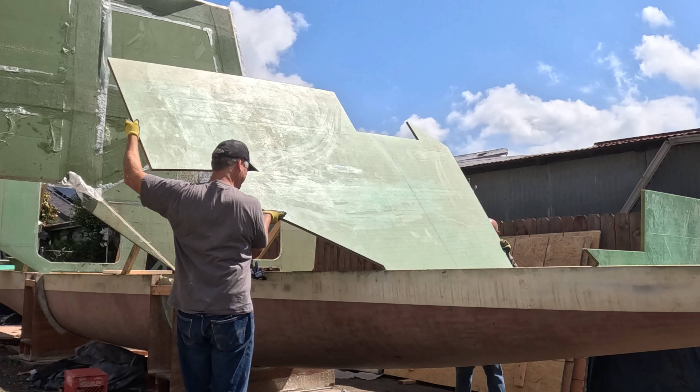Well, now that our major bulkheads are in, we can start putting in the smaller bulkheads, so we're prepping for that. And we're hoping to get at least a few of them actually glued in. And then we'll follow up the next week, of course, with getting them all tabbed in. So our goal is in the next 2 weeks, we're going to get all of them in, but we'll see how far we get this week.

But we have an important meeting we're going to do in the middle of the week here on Thursday with Bruntons and Schionning, because we have to go over our hybrid propulsion system because there's been some changes, and we're going to go over all those with you as well. But first, let's head over to the lot and we'll get at least some work done before we do that meeting. So off we go.

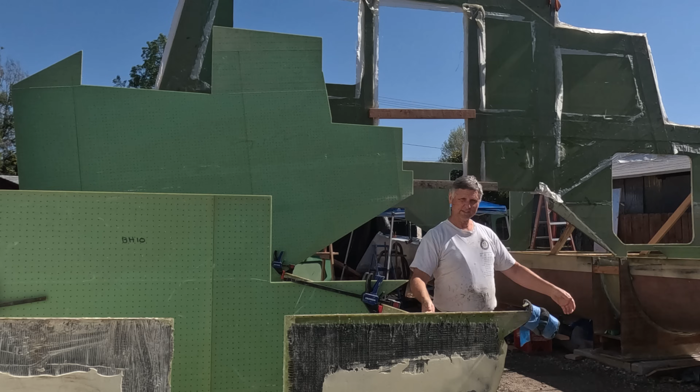Today we are temping in our bulkheads in each hull, the separate ones, not the ones that go across. And we're going to soon be gluing them in and then tabbing them also along with the ones that do go across up there in 5 and 6. So this is 10 and this is 7.

Now 8 and 9 span across the boat, and we can't put those in until we have brought the diesel engine in and inserted it right here. And so we need enough room to come in with the Bobcat to drop that engine in. So that's why we're not going to put the ones that go across the stern yet. But we can do all the other bulkheads, and there's quite a few up and down the boat. So that's the plan. We're going to get that done, and then we're going to work on that tomorrow.

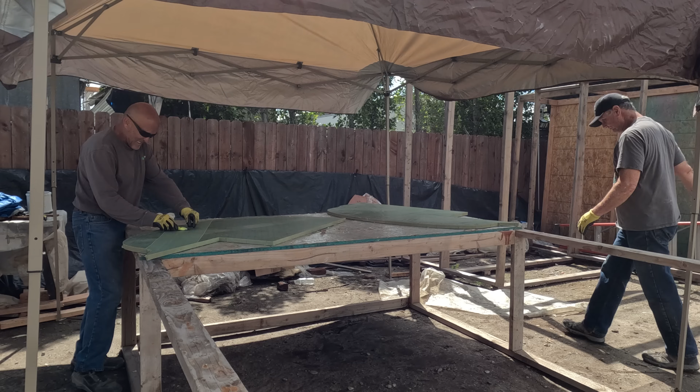And then we're also going to be pulling all the peel ply off of all these different bulkheads. So there's probably about 20 of those we have to pull peel ply off of, so that'll take up much of today. In order to glass these in tomorrow, we got to pull the peel ply on them. And we love pulling peel ply. It's good that we love it because there's about 600 pieces to go that we have to pull peel ply on over time. Not all today, but you know. Many of them are much smaller.

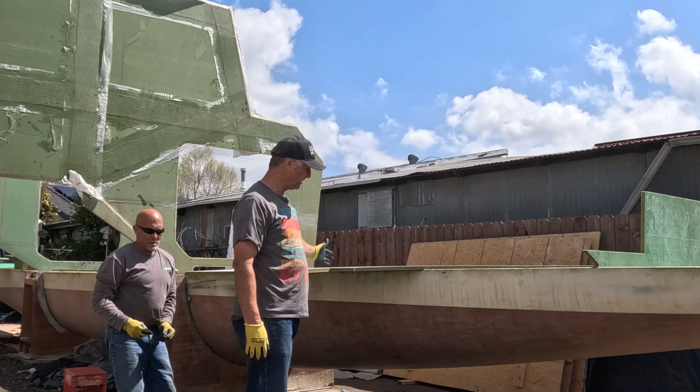Bulkhead 10. Only have like 12 to go. All right, we've marked our distance up to 2850 in millimeters to where bulkhead 7 goes. And now we're going to temp clamp it in place. Let's tilt her up. You gotta come forward. Yep. Okay, and this is the inside, the mark is to this side. Not centered. Okay. Are you there? I am there. That fits in pretty good.

You have a bulkhead 8? Yeah, well, it doesn't go in because it goes all the way across. And bulkhead 9 goes all the way across, but we have a bulkhead 10 we can clamp in right now. We just need the measurements. Needed a temporary brace on that one because it's pretty tall and the afternoon wind. So we just got a brace that's screwed in down here, clamped up there. It'll just keep it from tipping.

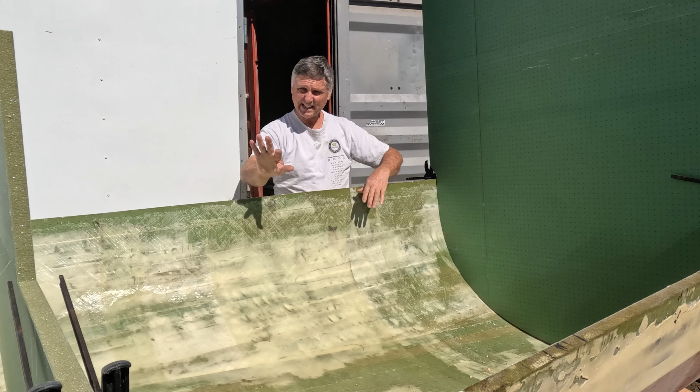We can glass in 7 and 10 here, but before we could glass in 8 and 9 in here, and this is of course after the diesel's in, we need to build a keelson that goes along the bottom of this. Now there's a keelson at the stern where we're at right now, and there's also a keelson at the bow, but we have a little bit more glass work to do up on the bow still, so we're going to try and get to that glass work today so that we can get bulkhead 0 in there, because we have to go from 0 to 3 for the keelson that goes in there. So we've got some work to do on that, and that's what we're going to try to get to this week. But for today, we need to finish some glassing up at the bow. There's some reinforcements and such up there that we have to do.

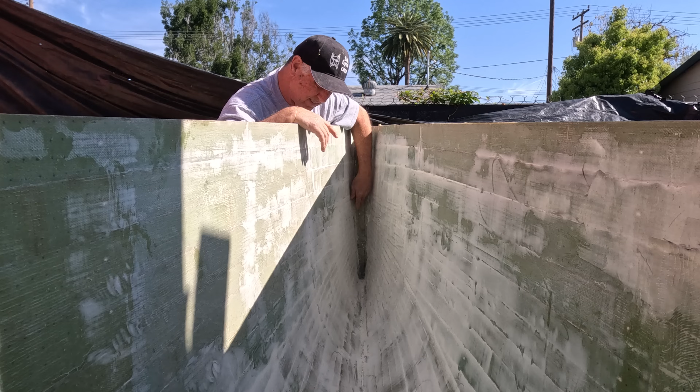Next up on our work on the bulkheads is we actually haven't glassed in just this little bow section right here, and that was because we've got some special work we had to do up here, so we left this section not completed when we did all the rest of the hull. So we're going to do that today. So we're going to glass this in, but first we're going to fix this up with some coving and stuff, because there's a piece of fiberglass that has to wrap around the front here besides the ones that go on the side.

So we've got to prep this for that with some thickened epoxy, and then we'll go ahead and lay down the sides of this and glass that last piece in. So we'll get all that done today. So we have the first, the nose piece, and another one up there that goes across. So one goes around the nose and one goes down, and now we got to fill the last piece in, which is right here, and connect these two.

So because this is very sharp right here, and we didn't want to fill a ton of thickened epoxy to round that off because it's just more weight, what we're doing is we're just taking the fiberglass down and meeting at the bottom here, and that way there won't be any bridge across that sharp part, causing a void in there. We don't want any voids.

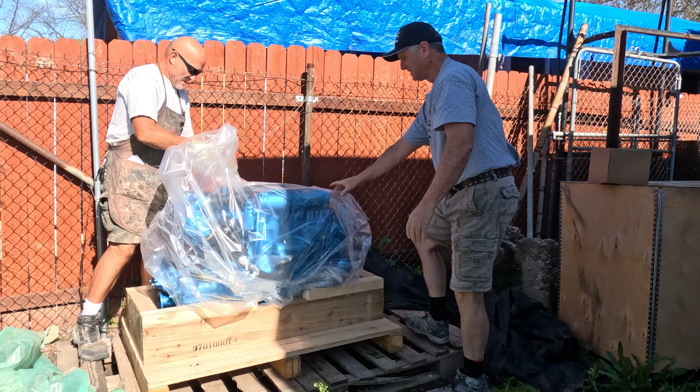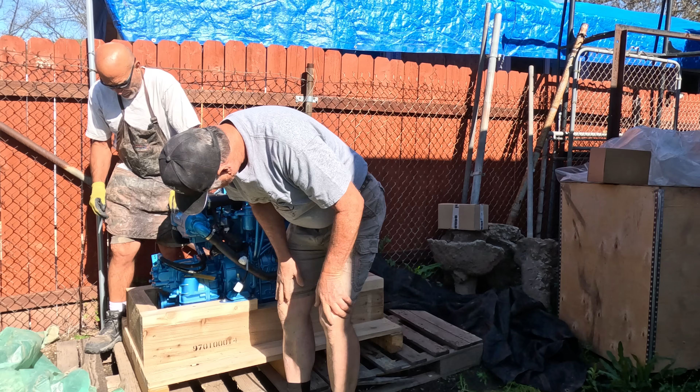There she is. And the critical area is right down here, the transmission, and that's exactly what I thought. This transmission is straight through the diesel, and that is what I expected it to be, but the plans for the boat that's being built in Australia right now, they're using a Yanmar instead of a Nanni, and that transmission is set at a 7-degree angle where ours is set out straight.

So that's going to change some things about how these motor mounts are going to be built, because this whole engine is probably going to get pitched a few degrees. The Nannis can be pitched up to 7 degrees, the entire motor.

But just for fun here, we're going to take a measurement of this so I know what the exact length is. We have it from plans, but I want to see for real, right to the end of the furthest out bolt to over, so we'll check that out. We see 130 millimeters. Centimeters, goodness. 130 centimeters.

This is the loom, and this goes up to the helm where the gauges are. And this is the main reason that we moved the engine. You have those cutters still? I do. Originally, we were going to be having the engine on the port side, and we moved it over to the starboard side later simply because I don't want to order an extra long loom.

And so this one should be long enough to reach from where we are on the starboard side here up to the helm, which is going to be about here. So much closer. So this should get to use the standard size loom here instead of paying for an extra.

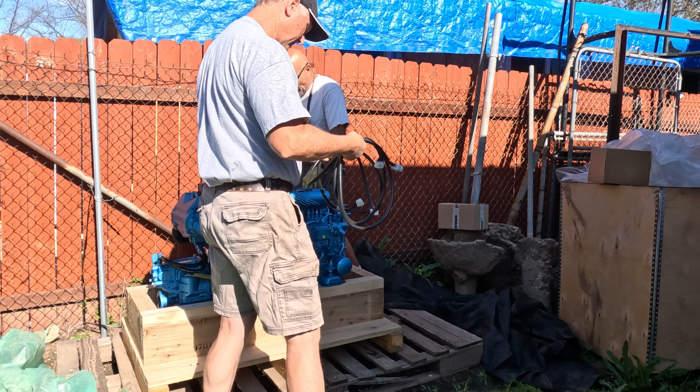It doesn't really matter which side of the boat that the diesel's on and which side has only the electric motor. This is a good place to head back to the office and talk about our meeting this week with Schionning Designs and Bruntons. So as we mentioned, we have to get the diesel into the starboard canoe pretty soon, otherwise we can't put the rear bulkheads in.

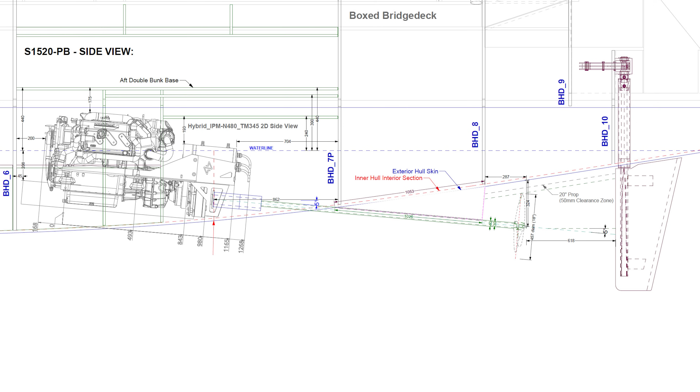And that means Schionning has to design the motor mount system for our specific hybrid propulsion engine. In order to accomplish this, Schionning needed to know about our entire diesel hybrid system, from engine all the way to the prop. And Bruntons needed to know some particulars about our propulsion system as well, so that they could design the right EcoStar autoprop layout and sizing for our catamaran.

So we got the two companies, Bruntons from England, Schionning from Australia, and of course we're in Southern California. So we found a time where we could all get together, early in the morning for me, late in the day for them. And we took a look and discussed the list we have of our desires for our propulsion system. So let's take a look at each one of these desired points.

However, we went over some of these in a previous video, which I will link up here or down in the description. So I'm only going to briefly touch on those, but we'll spend a little more time talking about the new additions to our propulsion system. So let's take a look at that whole hybrid setup.

Here are the 10 goals we went over in our desired diesel-electric hybrid propulsion system. Though it may look like we would have to compromise on some of these wishes, we believed we could achieve them all if we could get the right setup. Number 1, while motoring forward, supply at least 100 horsepower to the props for emergency power. Between our single 80 horsepower Nanni diesel engine on the starboard side, with a 25 kilowatt electric motor attached, and our 25 kilowatt electric motor on the port side, we'll get about 100 horsepower total.

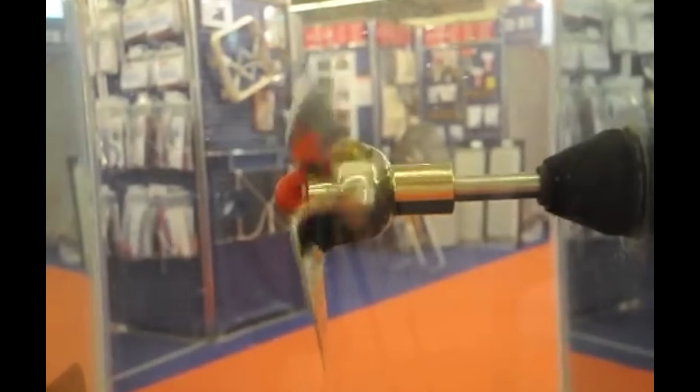Number 2, in reverse, we need efficient stopping power to slow the boat when needed. We use an EcoStar autoprop from Bruntons, which has reversing blades that put the leading edge of the blades in the correct direction for efficient thrust, this time in reverse.

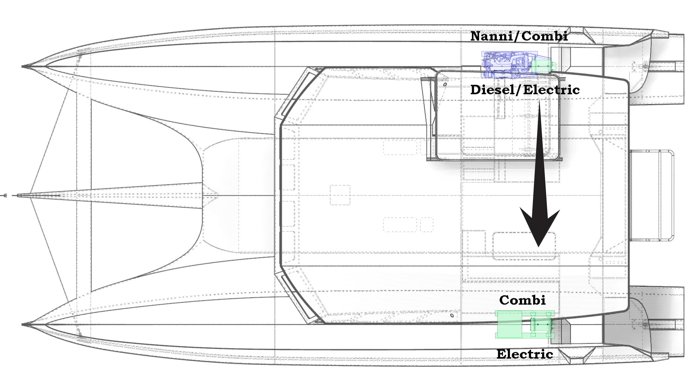Number 3, drive both props from one diesel engine for long-distance cruising. As mentioned in number 1, the diesel turns the electric motor on the starboard side, which sends 12 kilowatts to the electric motor on the port side. This is enough to achieve cruising speed, so both props are turning, which means we don't have to use the rudders to offset the turn from just one prop spinning.

Number 4, we need to drive both props from the electric propulsion. We have a 25 kilowatt electric motor in each hull, so when we have enough battery power, we can power both props from our electric motors.

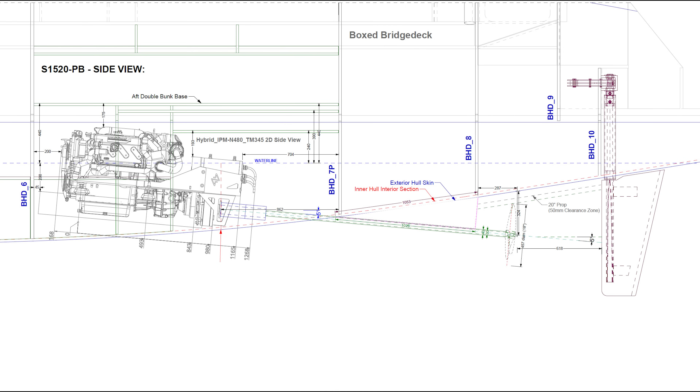Number 5, have efficient thrust whether the diesel or electric is turning the same prop. Diesel engines run at a higher RPM than an electric motor, but we have both attached to the same prop shaft and prop. The only way to have both work efficiently is to pitch the prop blades differently for the engine versus the motor. Fortunately, the Bruntons EcoStar Autoprop will do just that, since the blades change pitch automatically based on RPM.

Number 6, we need to regenerate power while sailing from one or both props being turned by the passing water. The Combi system is made to do regeneration. It'll let your props turn from passing water. They then turn the electric motors, and we get power sent to the batteries from wind. Number 7, have the props be efficient for regeneration. Since the EcoStar Autoprops adjust their blades automatically, they're well suited for efficient regeneration.

Okay, so now let's talk about the additions to our system since we made that other video. Number 8, use the diesel as a 12 kilowatt generator as we're motoring or at anchor. The issue here was that the diesel was always going to turn the shaft if it was in gear to turn the Combi electric motor. That means we could use it as a generator, but only when underway. We want to use the diesel and electric motor combo as a generator while we're at anchor as well.

For that, we would need a way to disengage the prop shaft where the electric motor belt is attached. I talked to Combi about this a few months ago, and they designed a new magnetic decoupler system that does just what we need at the push of a button from the helm. Now, you shouldn't run a diesel without a sufficient load on it, but that's taken care of by our 25 kilowatt motor being turned by the diesel when we're in generator mode.

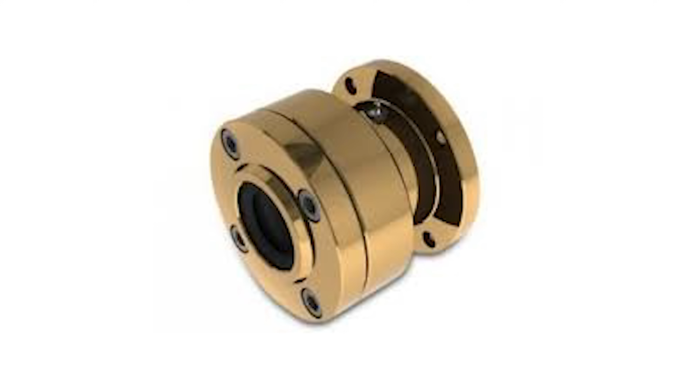Number 9, cut down on vibration from a straight shaft setup. Straight shaft systems are known for having more vibration than sail drives. But if we add a Bruntons Sigma drive between the shaft and the prop, we can cut down on that vibration. And if there's any flex in the boat or motor mounts, the Sigma drive allows for 3 degrees of movement, which takes the strain off the gearbox.

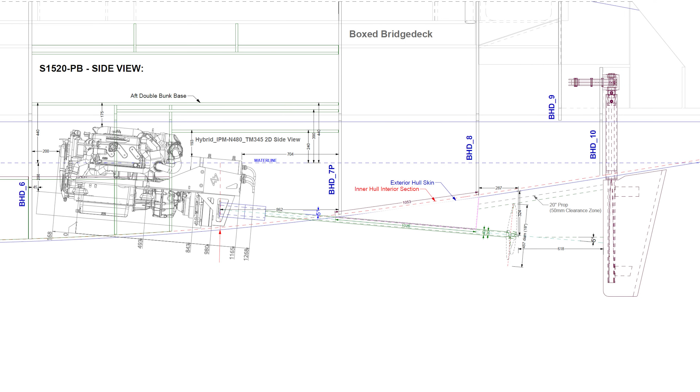Number 10, feather the props for less drag, unless, of course, we're regenerating. We needed a solution that would allow our EcoStar props to feather. To make that happen, the shaft must be stopped and prevented from further turning. Otherwise, the water will turn the props and the blades will deploy and cause drag. We needed to find a prop shaft brake that will allow us to stop the shaft.

Bruntons makes such a brake, and it's called the Auto Lock. Unfortunately, it's designed to work on a diesel-only boat. It consists of a brake rotor, a caliper, and an actuator. The actuator is tied to the diesel by oil pressure. While there's pressure, the actuator unlocks the shaft, and when there's no oil pressure, it locks the shaft automatically.

But with our hybrid electric motors, that means when the diesel is off, the shaft is locked, so we couldn't use our electric motors. The solution I came up with is to purchase just the brake rotor and caliper from Bruntons, but not their actuator. The auto-lock caliper is actuated by a cable. All we need to do is purchase a set of cable throttles. Normally, these are used to pull a cable attached to a carburetor, but instead, we'll have the cable pull the caliper closed on the brakes.

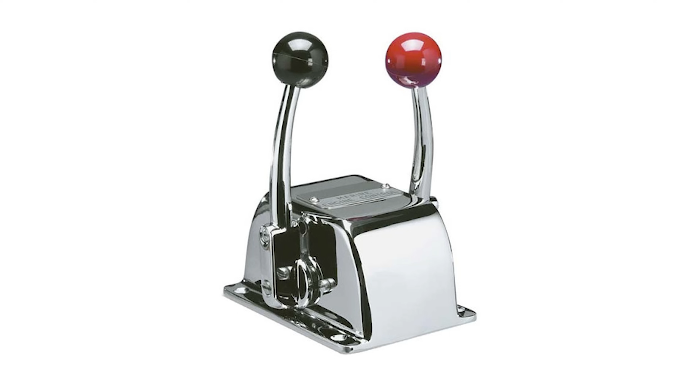Now, we can stop either or both shafts using the 2 throttle levers. That way, if we want to regenerate from just one prop, we can lock the other one. Or if we want to sail with less drag, we lock both and the autoprop blades will feather. David at Bruntons was happy to sell us just the rotor and caliper and agreed my solution should work just fine. So, by adding these additional mechanisms, we can achieve all our goals without major compromises.

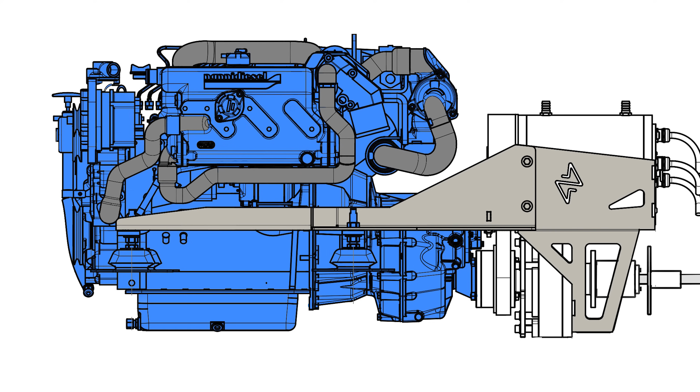Here's the layout for the starboard side, which has the diesel. It's the most complex, though the electric system on the port side still needs the Sigma drive, Auto Lock, and EcoStar prop, but does not need the magnetic decoupler. But let's take a look at the diesel side and where all these systems are located. And this is the Nanni diesel in blue, with its gearbox. Then, there's the 25 kilowatt combi electric motor shown in green, with custom combi brackets shown in silver. These attach to the motor mounts to hold it in place. A belt goes from the electric motor to the prop shaft.

Next, the magnetic decoupler from the combi sits on the shaft under the motor, shown here in gold. Heading further aft along the prop shaft is a Sigma drive from Bruntons. This is shown in dark blue. Finally, aft of that on the prop shaft is the rotor and caliper from Bruntons Autolock system. Though it isn't shown here, the EcoStar prop is at the end of the prop shaft.

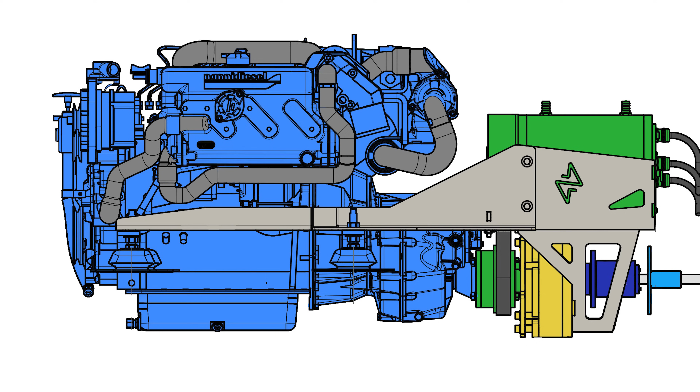During the meeting, Robert from Schionning showed us the design from another Solitaire 1520 being built in Australia. But they use a Yanmar diesel engine with a different gearbox and a smaller electric motor. In their design, the prop shaft is attached to the hull with this skeg. However, David from Bruntons pointed out that their autoprop blades need space to flip around, and might have problems with that skeg design. He suggested changing to P-brackets to hold the prop shaft, and I agreed. Bruntons offered to supply those brackets for our system, and I accepted. So that's our very configurable, efficient diesel-electric propulsion system for SV Lynx.

Now Schionning Designs and Bruntons are working together on the design for our motor mounts and the prop and how far it is from the hull and how far from the rudders and the angles and all that good stuff. So they're doing a little back and forth and working out a design that works for both. And they'll get that to us soon, and we need that because we can't put those bulkheads in at the stern until we build the motor mounts, and until we get those plans from Schionning, we can't do that.

So speaking of working, let's go ahead and go back to the lot because we still have a couple days worth of work and we've got a lot to get accomplished this week. See you there. It's Saturday, end of the week, and we've accomplished a lot of things this week on getting our smaller bulkheads in.

But we didn't show you tons of that simply because we were pulling peel ply off all these different bulkheads. One's way down there, the ones are in there, the ones are in this pile here. A lot of work pulling all that peel ply, but that would have been boring, so we only showed you a little bit of that. And we had a lot of prep work inside the hulls because we had to rough up parts of the hull to mount these in and stuff. And again, the sanding, so we didn't show you a lot of that.

But we had a lot to talk about with our hybrid propulsion system since we had our big meeting with Bruntons and Schionning about that. And it seems like that's an odd thing to be doing right now, but it isn't, because we've got to create those motor mounts inside. Actually, it's not this hull. The motor mounts are over on the starboard side. And for that, we need the plans. And to have the plans, we had to settle on all the different parts of that propulsion system. So that's why I went over all that with you guys a few minutes ago.

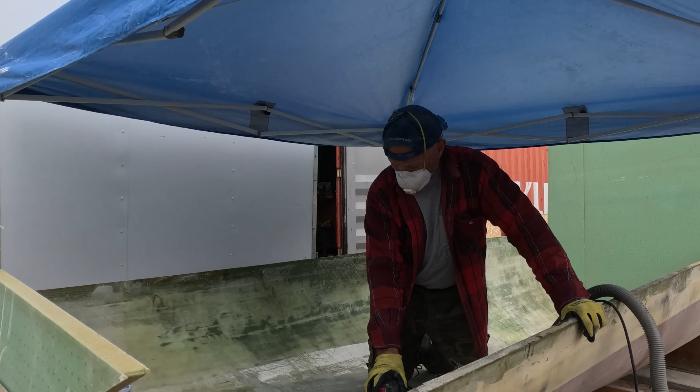But today, we're done with prep, and so we're going to get started glassing in some of the bulkheads. And by the end of next week, we're going to have all of these in. So we're going to start out and do bulkhead number 10 and bulkhead number 7. Remember that 8 and 9 are going in later after we put the diesel engine in, which is why we've got to get that engine work progressing. But we'll put in 10 and then we'll put in 7, and then on both sides. And then next week we'll go ahead and put in the ones going on forward. So that's what we're up to today. We'll show you that. First things first, Brian's going to roughen up the hull with some 80 grit sandpaper there so that we can start bonding that bulkhead number 10 in.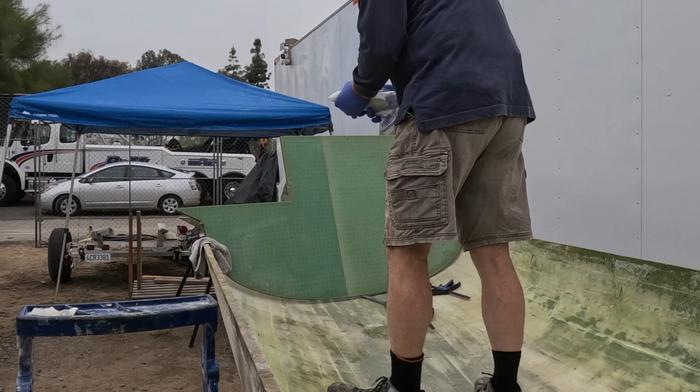All right, so we've got this in place and we're sticking the cove on the side here so that it'll be ready to tab in later.

Brian's got like 8 hands there that he's got to hold stuff with. He's an octopus, the girls say.

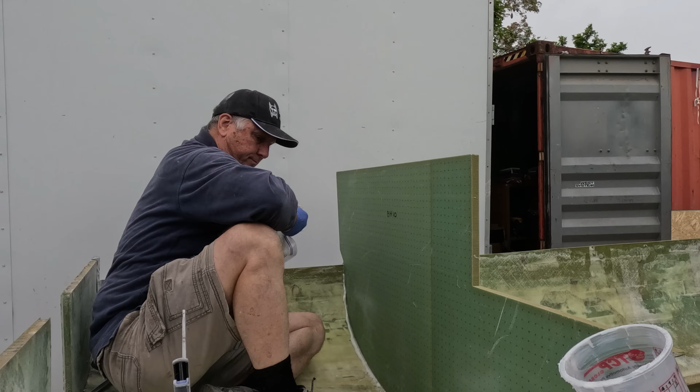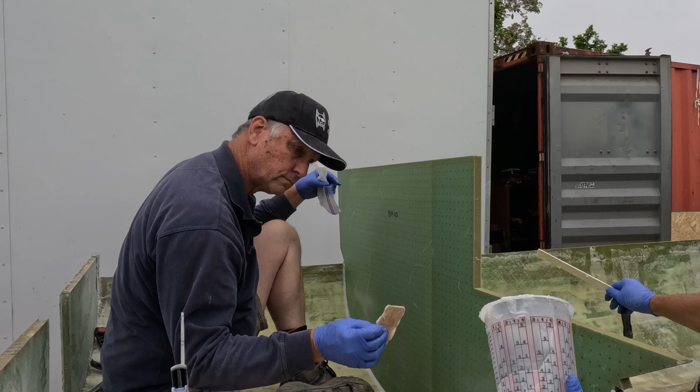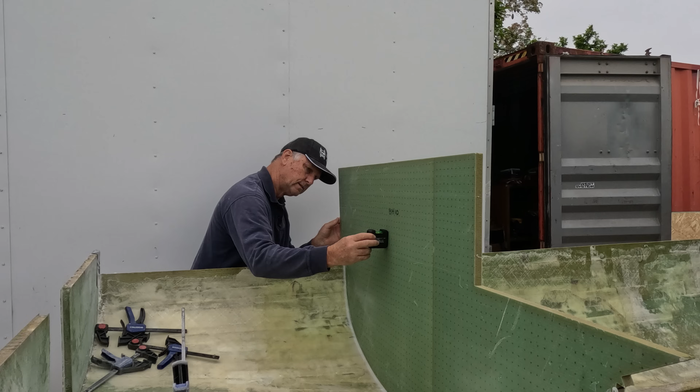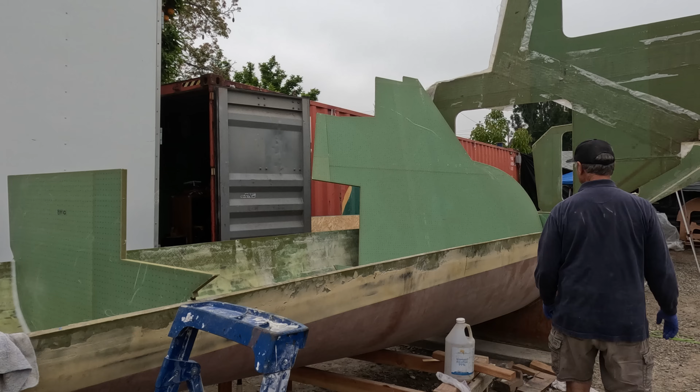Okay, number 10 is in. We'll get the level out, make sure. We already leveled it once, but we'll level it again, assuming I don't kick it right now getting over here. I did not. Let's take a look at where we're at. Zero. That's what we want. All right, so we got our cove in, and I've double checked the level on it. We're good to go there. Do a quick test. Don't bang that on the way by.

We already prepped 7 here to go in, so we're gonna go ahead and put our bead here for 7 and get it positioned. It goes actually about here. And so Brian's mixing up. We're gonna need a lot more epoxy. We used 900 milliliters over there. We're gonna need more like 1200 for this. It's a lot larger. As I mentioned, we're trying to get 10 and 7 in today on both hulls,

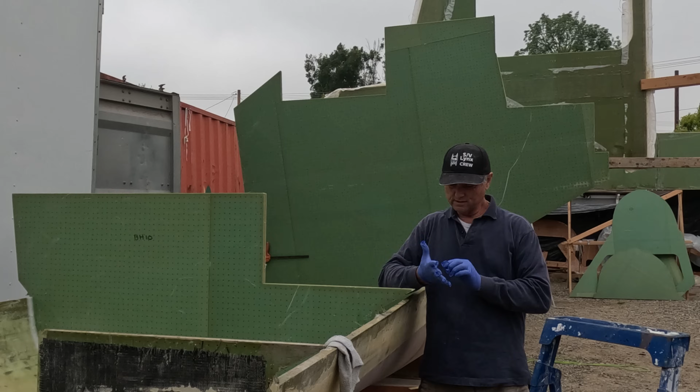but next week, our goal is to get the rest of them done, which is 0, 1, 2, 3, and 4 in both hulls. So that's 10 of them. But we're going to get 4 of them done today. And so we have all next week to get those other 10 in, and of course, tab all of them. And the tabbing will go pretty fast because we've already prepped for it. As we're gluing these in, we've already prepped, sanded for tabbing. And bulkheads will already be leveled like this one is, and glued in, so we can just go to town on tabbing. So we should really be able to get all of these bulkheads in, which are, from a tabbing standpoint, 10, 7, 6, 5, 4, 3, 2, 1, and 0.

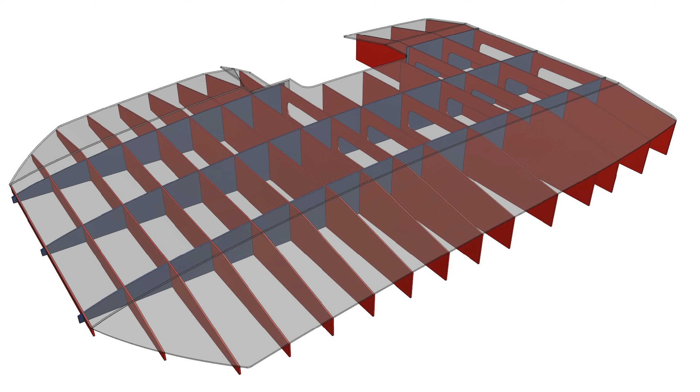So lots to do in the next 5 days of work, but we want to get that done because the next thing we're going to do after this is build a cabin roof. And we're really looking forward to getting to that. And that includes the rain catchment system. And I believe the most time in getting that thing built will be the rain catchment system. That's going to be the most work, but it's worth it to me because we get that handhold and that recessed track that's easy to clean out. It's just a lot nicer. So it's worth that extra work. And then the other thing that's going to take time is setting up the MDF forms and getting them all perfectly leveled everywhere before we build the roof on them. That'll actually take more time than building the roof.

Building the roof is pretty darn easy, with just 5 pieces that we have to tab together on 1 sheet of laminate, not over the whole thing, just down the center. So it's pretty easy to build the roof. It's just that the rain catchment system is going to take a little more work than that.

But we added that. If we just had to do the roof the way it was originally designed, this thing would be done in a couple days. But it'll take a little longer because of the rain catchment system. But we want it.

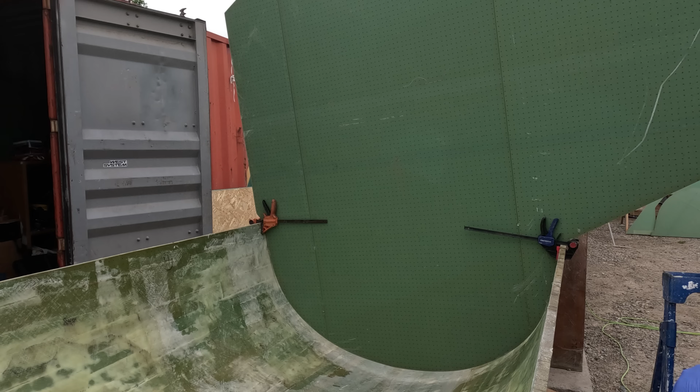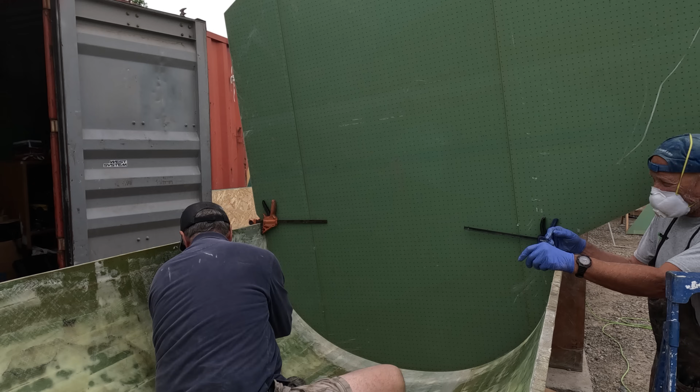All right, time to glue in bulkhead number 7. Okay, that's the initial bead in, so we'll be able to set this on, and then Brian's mixing another one so that we can put the cove on either side once we get it in place. So we'll wait a moment. This won't set up that fast.

It's pretty cool today. We're about 65 degrees Fahrenheit. But this West System epoxy is great for this stuff because we want it to set up fairly rapidly. We don't want to wait forever for this epoxy to get going. So we want to use West System for this, but it also means we do have a clock on it of probably about 30 minutes that we've got to have this bulkhead on here. But it'll only take Brian about 5 more minutes to mix up another batch for the cove, so we're good.

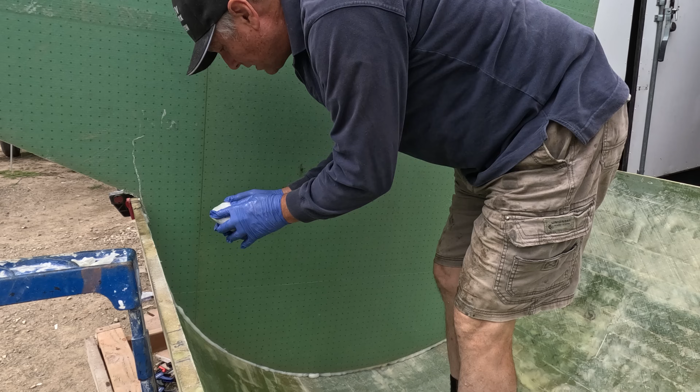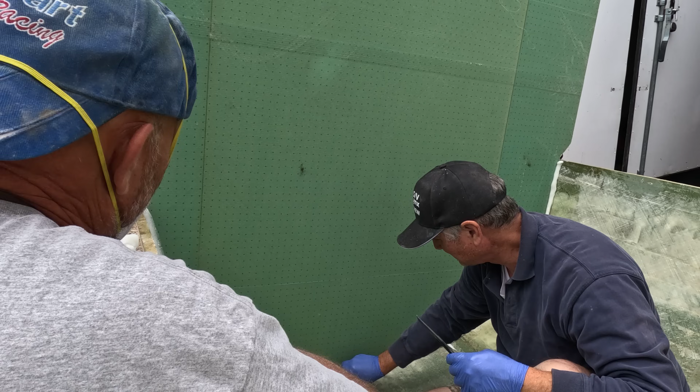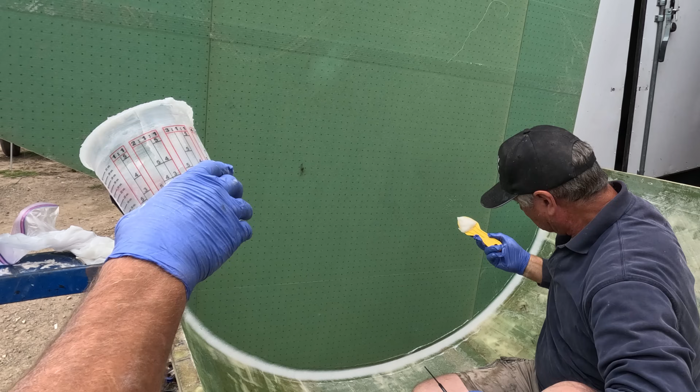Okie dokie. Let's go up. Pretty high up so it gets past, yeah. Now down. Ooh. It starts getting more interesting. Trying to go down at the same time as you. We're about the same amount down. How's that? Just a little in the corner right there. Okay. That went well. I say it looks nice.

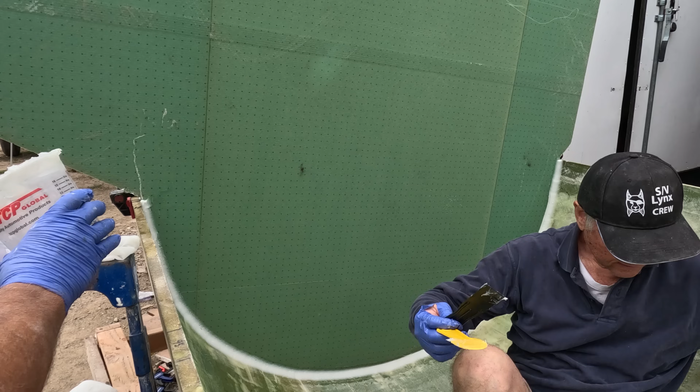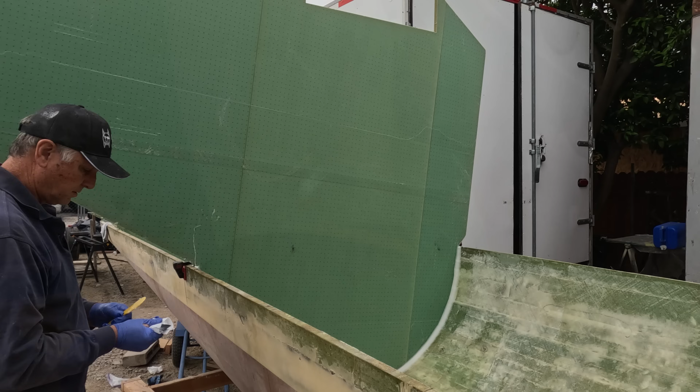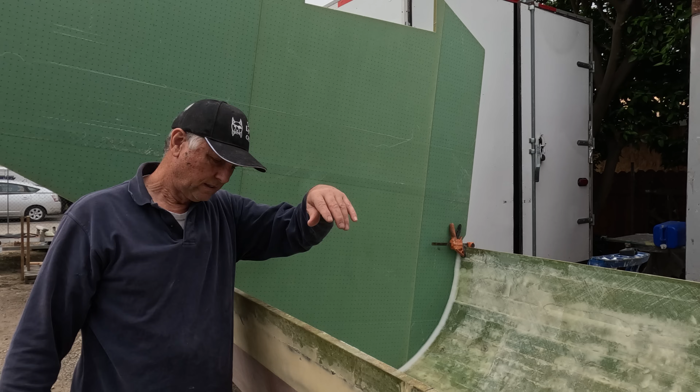Very good. All right. Now we just got to check the levels on everything. We leveled it when we put the first bead down, but that was only pretty good, meaning we're going to double check it down to the tenths of degrees now. Make sure that it's nice and in position before this sets up. Dead level. Actually put some clamps on it, make sure that it's not going to go anywhere. There's no wind today at all, so it's a good day to do this because I don't have to worry about a wind gust suddenly moving this before this sets up.

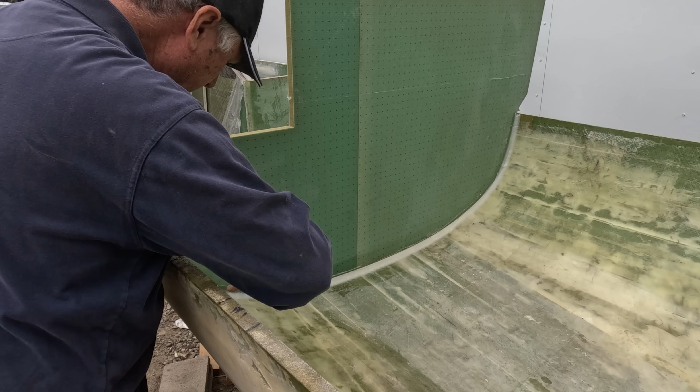But being West System, in another 30 minutes to maximum of an hour, this is going to be set up enough that this isn't going to move at all. For example, over here, just check this. Yeah, that is now the consistency of Jello already, and this has only been 30 minutes or so. So another 30 to 40 minutes, this will be very solid. But even now it's not going to move because it's set up enough that it's holding it. Of course I don't want to hit it with something, but it's just not going to move easily right now.

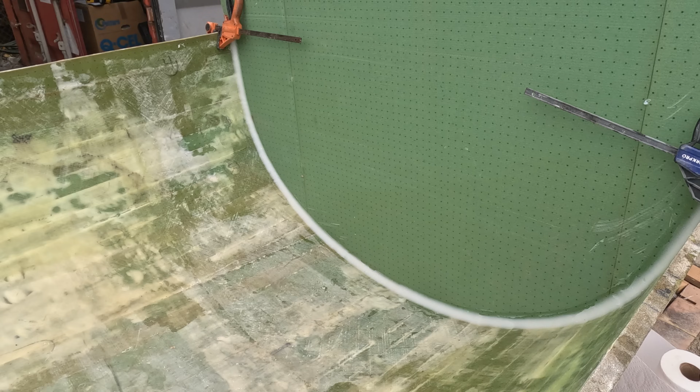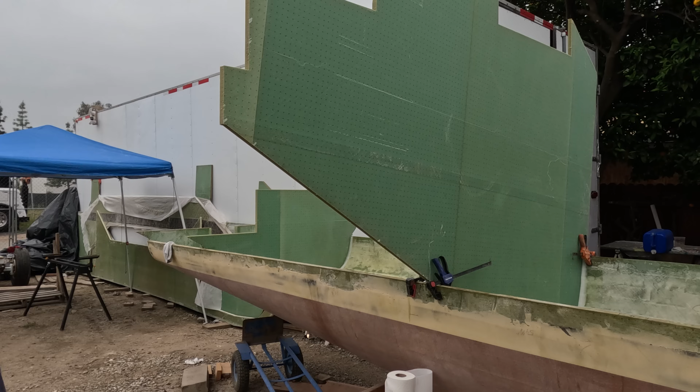And so we got the cove there, and cove on that side, and a cove on this side. So bulkheads 7 and 10 are in. Well, they're glued in. We're going to be doing the tabbing next, probably Tuesday and Wednesday. We're going to be tabbing all of these bulkheads. Right now we're going to concentrate on just getting them all in there glued.

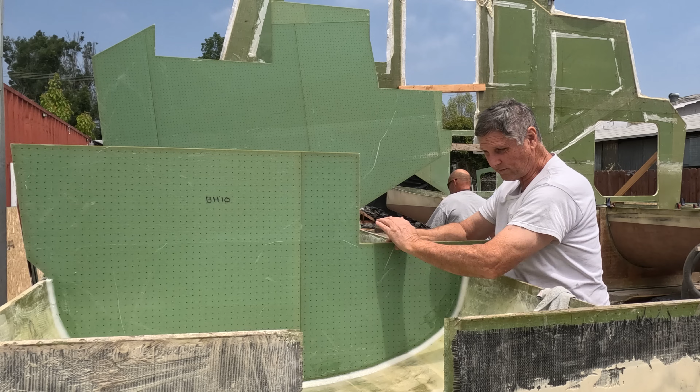This is why we wanted to use West System epoxy, because we just went to lunch and this is already hard as a rock here. So this is fully glued in and not going anywhere. Neither is 7. This is also completely set up over here. So now we don't have to worry about this falling over at this point if we touch it. So good to go. So we're going to go to the opposite hull over on the starboard side and do the same thing, 10 and 7.

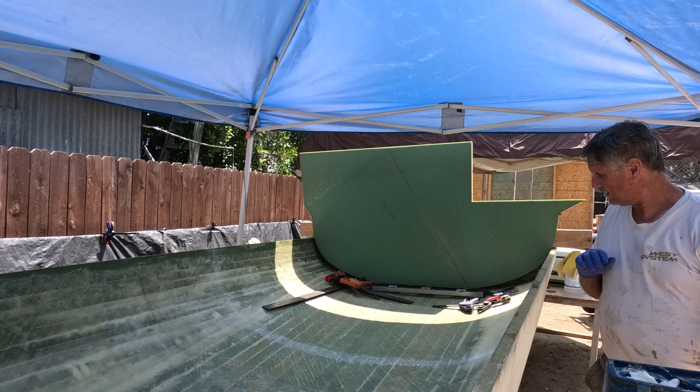Over to the starboard hull, and this is where 10 goes. We've roughed it all up, we've cleaned it, ready to put it in, and we dry fitted it, of course, to make sure that it fits properly. And so we're going to drop 10 in, and then as soon as that's done, we're going to do 7 up in front there. And that's our goal of the day, is to get 7 and 10 done on both, and we're going to achieve it.

Things are going well. It's exciting to be building the assembly of the boat. I don't care what it is, bulkheads, webs in the floor, eventually furniture, any of that stuff that is constructing the boat is fun for me to do, because every step is one day closer to us getting out on the water, and we're very excited to do that. Got a lot of learning to do between now and then. So we're cooking. I gotta go. I can do it from in here on this little guy, number 10.

Okay. Are you on the? I'm totally centered on my marks. Okay, down. Okay, but what we don't know is if it's level. Right. Grab that. Thank you. Oops. We are level, so that line's way off.

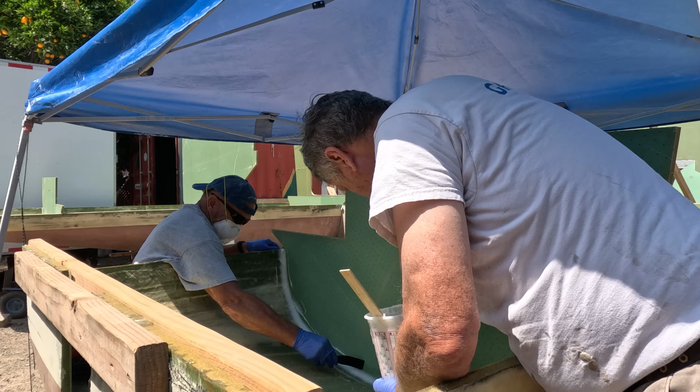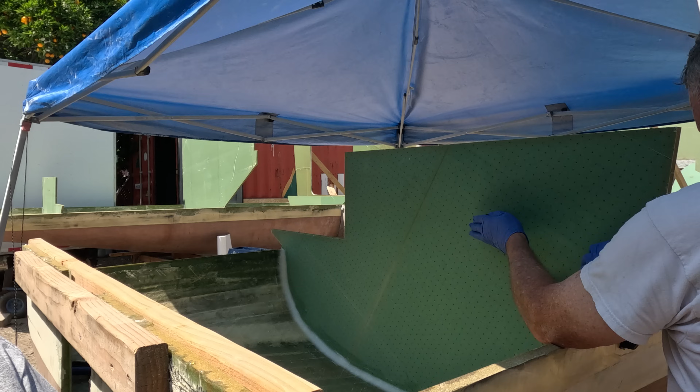How about the top? Perfectly level. All right, we're gooping up the stern side of this now. Look at it smoking like a... Oh, yeah, it is. Okay, that's level. And that's good. All right.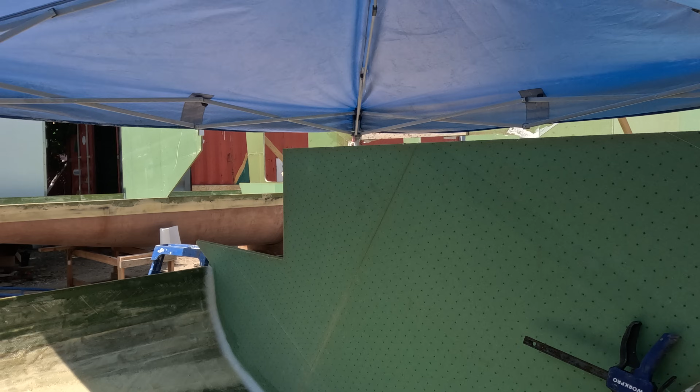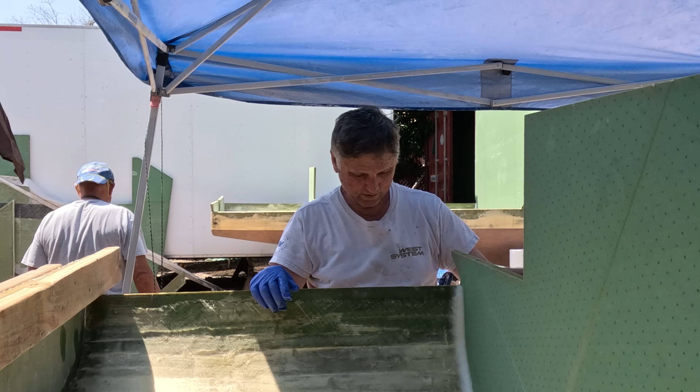So it's as cool as it really can be, but there's quite the exothermic reaction on this stuff. So it literally gets smoking, and this isn't that thick. If it was in the cup, it would be even crazier, but just the way it is. Nothing we can really do about this. The temperature is correct for doing epoxy, and we're not in the sunlight, so it is what it is, but it is smoking.

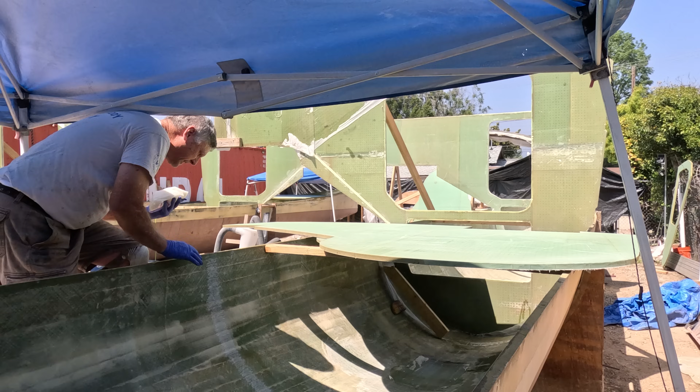All right, well, it's this warm. Brian's gonna keep mixing while I get this first batch on, because we gotta get 3 batches done for this larger bulkhead, and we don't want it to set up too fast.

Well, that concludes our work at the lot for this week, because we achieved our goals. We got all the peel ply off. We got prep done on both hulls for the bulkheads, and we started gluing in the first 4 bulkheads. So next week we'll do the other 8, and that'll go easily because, again, we've already prepped for it all and got all the peel ply off. So that's going to be Monday morning.

We'll start gluing those babies in, and we'll get 4 done per day easily. So 2 days and we'll have all of them glued in, and then 3 more days we'll have them all tabbed in. So that's our goal by the end of next week, that all of the small bulkheads are tabbed in. Oh, actually, including Big Bertha number 6 and number 5 that we put across before, because we haven't tabbed those, and we'll tab those as well. So we're going to see you next week for that. But right now I'm going to toss it back to my house, and the Admiral and I will do a little wrap up.

Well, we did it. We got all of the smaller bulkheads prepped, and we even got 4 of them glued into the boat. Right, and we've also got some other things done as well for that, in sanding of the inside of the hulls and stuff, ready to tab in all of these. And because we got this far this week, that means that next week we're going to be able to get all of them tabbed in. So we'll have all the small bulkheads tabbed in.